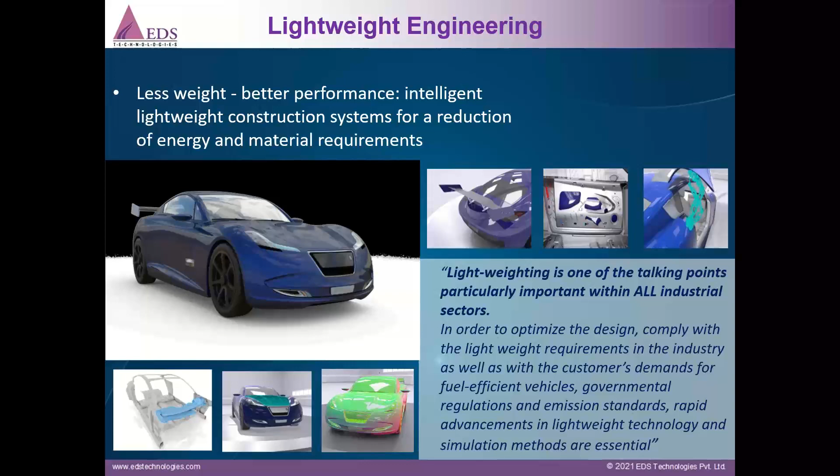Going back to the basics of lightweight engineering, also popularly known as lightweighting, which is basically a method for identifying the lazy parts. A lazy part describes a system - it can be a part, assembly or device in an automobile whose mass or portion of the mass is unnecessary. So we need to look at such parts.

They may contribute as a whole to the assembly as a system, but their mass is something which is unnecessary, which we can identify in the initial stage and try to replace or redesign them. A lazy part is basically one whose mass is unnecessary because the system is only required during the assembly process, and that particular part or assembly satisfies no functional requirements.

Or the system's functions can be replaced by redesigning the system - totally a change of solution principle - and then the system's functions can be transferred to another system by integration. That is, a part can be merged with another part to make it one single part, and the system's function can be conducted by an optimized system. This is the typical terminology we use in the automotive sector.

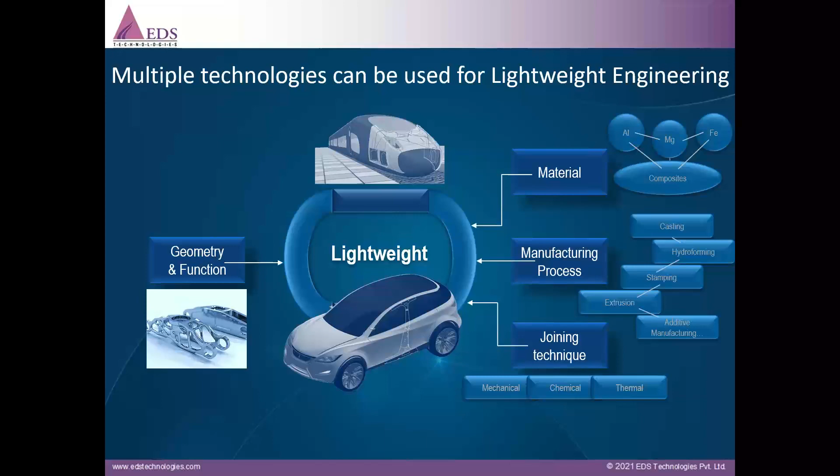So these are some of the important functions or technologies through which lightweight can be achieved in the automotive industry. One is materials, manufacturing processes, joining techniques, and also the geometry and functions. Let us see them one by one in this process.

We have a lot of roles or modules available within CATIA, a well-known software in the CAD world, wherein we can make use of these CATIA advanced modules to reduce weight and improve performance. We can do weight optimization using additive manufacturing techniques. At the same time, I can go for design for manufacturing using composites, making use of carbon fibers or aluminum and titanium, some of the few examples.

We can make use of these composite materials, which will make the entire component very light. At the same time, it is going to provide the best of stiffness and also thermal resistance, corrosion resistance, and so on. Similarly, we can also optimize the entire vehicle body using simulation concepts. I will explain these points one by one in the coming slides.

On the right side, you can also see we can optimize the manufacturing of thinner plastic parts with conformal cooling, and also optimize manufacturing of sheet metal parts. We can look at the overall weight of the assembly, monitor the weight, and balance it along the entire development cycle. We can also make use of an optimized fastening process through which we can cut down on overall weight and design lead time.

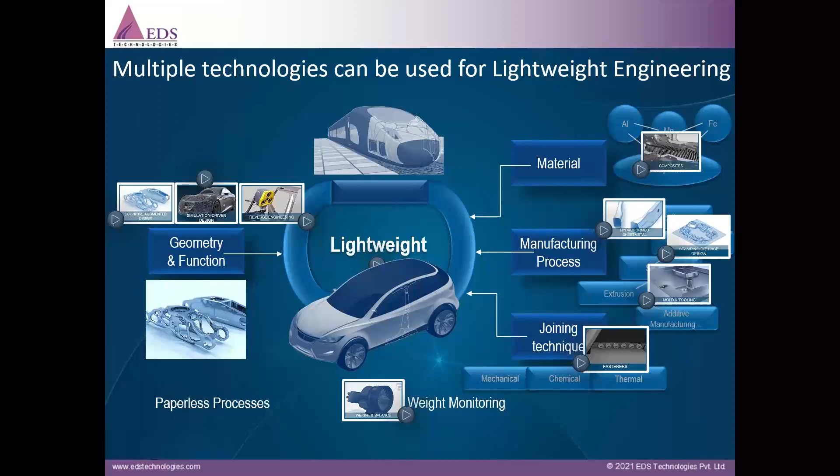And then the joining techniques, as I said, we can also make use of fasteners. This is another process through which lightweight engineering can be achieved. I will just highlight each and every one of these elements, which are going to work for lightweight engineering.

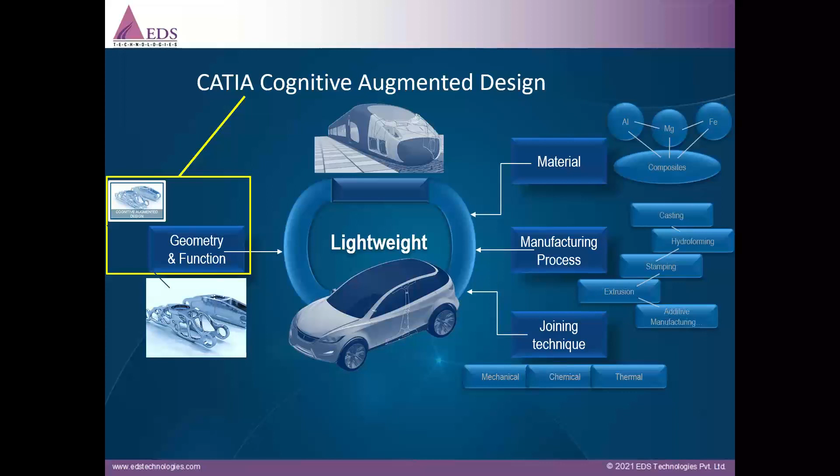So I'll start with geometry and function, because it is easier to modify the design and get the best shape of a given model or part, and then check for the performance and implement that. So we'll start with this process, which we call cognitive augmented design.

A human brain can recognize unknown shapes, and then they can be augmented in the form of a design process. So here in this case, there is a model which in the beginning has got a certain mass or weight, and then has typical functions. Looking at those functional requirements, by respecting the functional requirements, we can start the process.

We can also check for the loading conditions, and we can also set the manufacturing process. The manufacturing process could be milling, casting, or even additive manufacturing. So we can set the manufacturing process in this aspect, and we can run through simulation, find out where exactly the stresses are coming in, keep those areas where stresses are coming in, and remove the areas where there is no stress or pressure distribution across.

So by removing such kind of areas where there is no difference in terms of stress levels or pressure distribution, we can remove those areas in the form of shape, and come out with the areas which are actually contributing towards the loading conditions and performance.

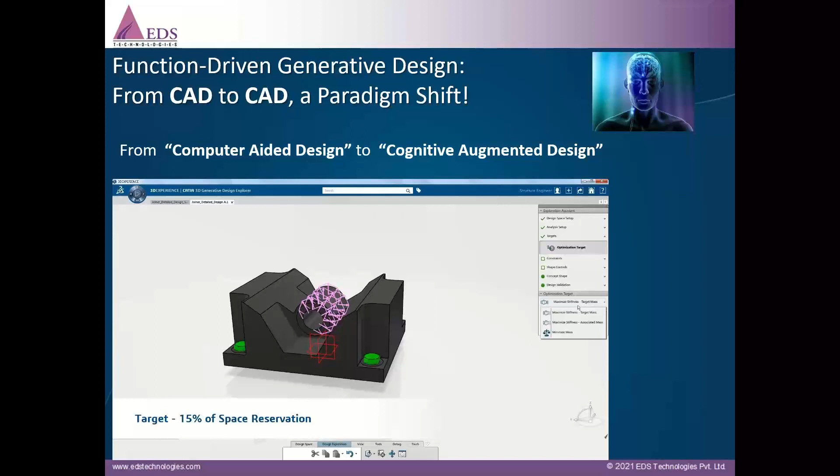And then arrive at the final shape. So this shape can be again formed based on specific manufacturing processes.

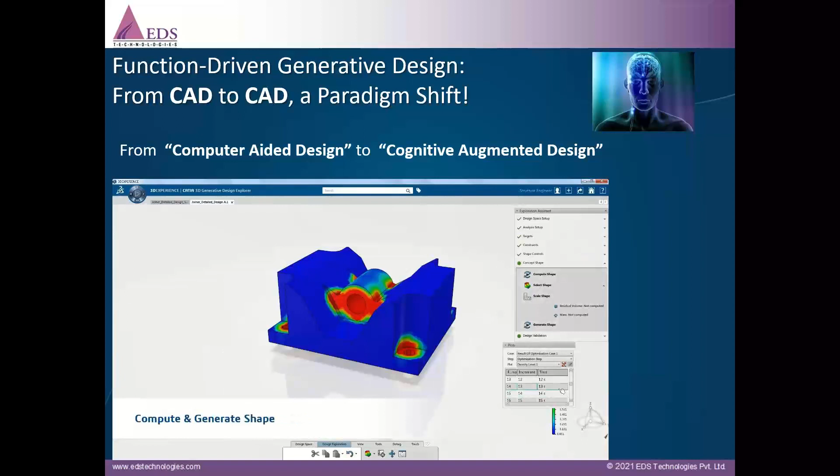As I said, it could be casting process or milling process, or it could be additive manufacturing as well. In additive manufacturing, there are no constraints because we are just adding material using different 3D printing machines. So by combining designing, simulation, and manufacturing under one roof, we are arriving at the final optimized shape of a model, which we can make use of for weight reduction as well as cost reduction.

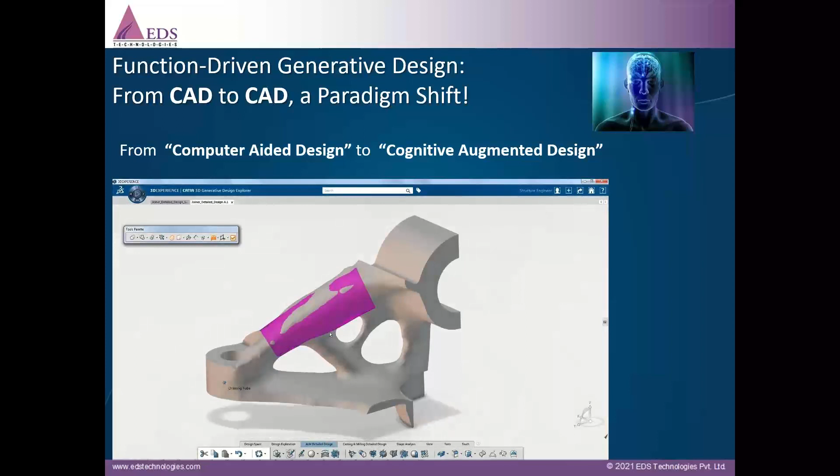So this is called cognitive augmented design, which is in place. Similarly, we can actually move from current traditional design to a science-based generative approach, because we are able to recognize such augmented shapes for the design and implement those shapes with respect to specific manufacturing processes.

This is possible only because we are able to integrate modeling and simulation along with manufacturing constraints in place. Using CATIA Function-Driven Generative Design, we are able to eliminate such weight when we are going to arrive at the optimized shape, which is also manufacturable from the perspective of manufacturing. That is how we arrive at lightweight engineering and reduce the weight and cost as well.

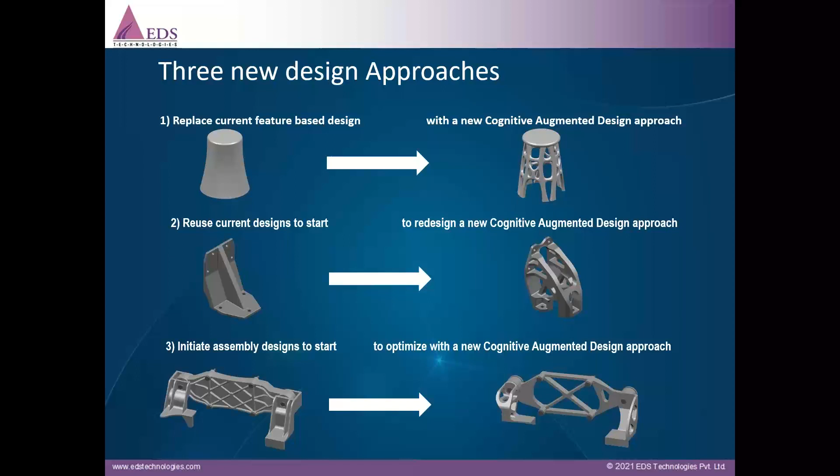I will take one more example. If you see the legacy component on the left side, it is around 414 grams, whereas the component which has gone through milling process is around 324 grams, which is 78% of the actual weight of the first component.

And when you go through additive manufacturing, there are no manufacturing constraints in the beginning phase of design. There you can see the best shape coming in without losing any performance with respect to the functional requirements. So without losing performance, we are able to arrive at overall 55% of the weight with respect to the legacy component on the left side.

I will take one example from the automotive industry, wherein we are able to see this kind of weight reduction process in place. This is a typical example of a car hinge, used for opening and closing the door. This is a typical component which is going to go through this process of topology and shape optimization.

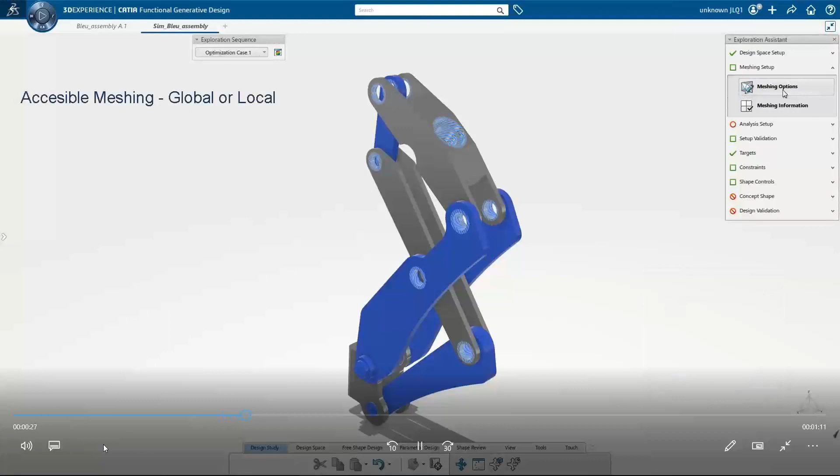What we do is recognize all the locations where there is motion happening through kinematics, and the loading conditions, because there is certain load acting from the car assembly. We take care of those loading conditions, and we set the restraints and clamping conditions, like the way we do with respect to CAE simulation setup.

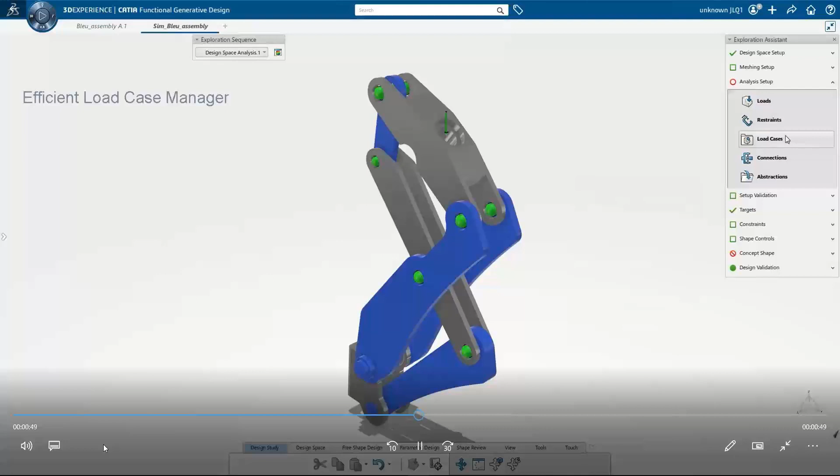And then we go for a first case, wherein we set the manufacturing process of, say, casting or milling or additive manufacturing. So we can set that manufacturing process and constraints and do the study. This is a quick study which is running on the design.

So if it is a manufacturing process, how the motion is going to be and what is the reduced weight of the component. If it is additive layer manufacturing, how the component is going to look like and how the motion is going to look like. We can do this kind of validations and studies on this component and finally arrive at the best optimized weight component for this particular requirement.

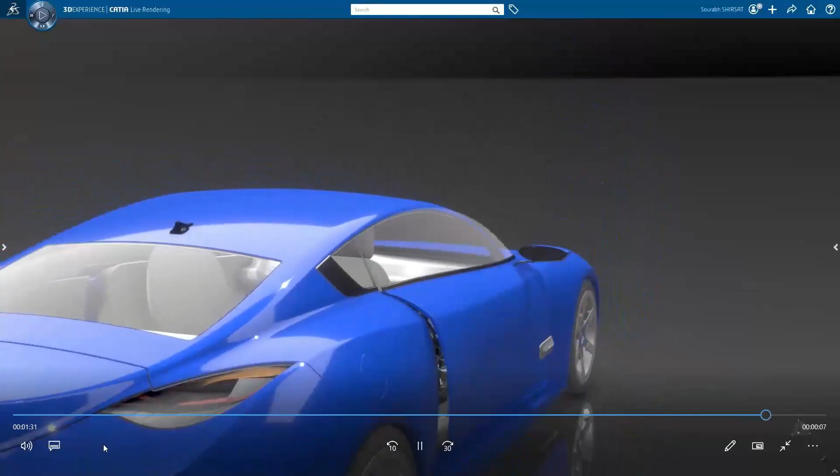So this is how geometry and function as a technology can be utilized using a combination of design, simulation, and optimization. This is one example I wanted to highlight with respect to lightweight engineering.

So if you see in terms of process, we are going from the design space, from the legacy component, setting the functional specifications, going through concept generation. Then finally, when the shape is removed, we are creating the exact solid generation.

Then we go for testing that exact solid in the FEA workbench, and then go through the simulation and see whether performance is the same or better.

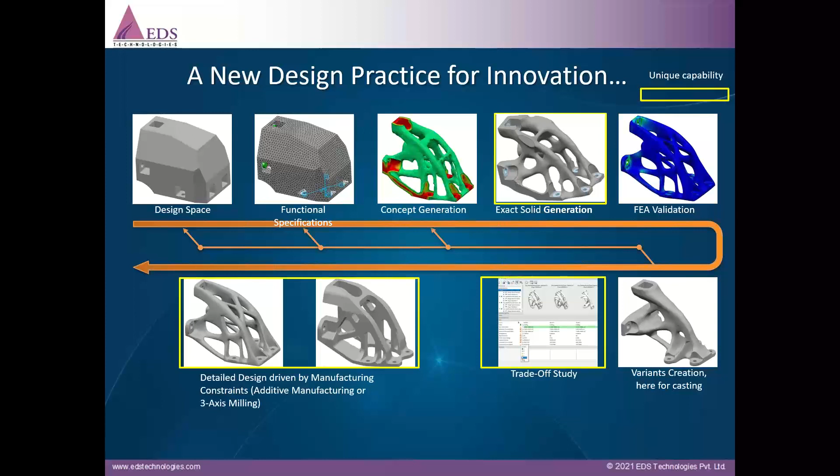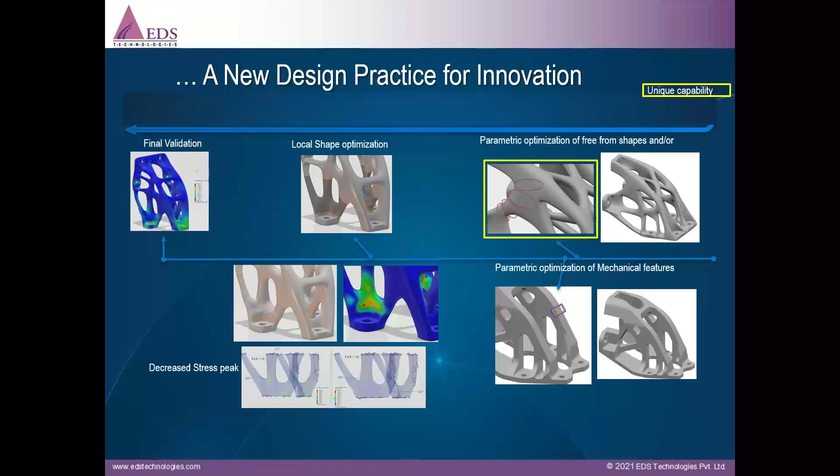So we can optimize the performance, we can optimize the weight, and as a result also the cost. This is possible using CATIA's generative design function. The benefits are that you can quickly run through a separate set of manufacturing processes, arrive at best shapes using these processes, and finalize and optimize the design resulting in lightweight engineering. The software is able to calculate those areas where there is no impact of stress or pressure, identify those areas, remove material in that area, and come out with an optimized solid model which is far better in terms of performance and reduced weight. This is possible under one workbench called CATIA function driven generative design.

It is also easy to quickly learn. Any designer who knows a little bit of analysis can run through this process and start making use of this entire process under geometry and function technologies.

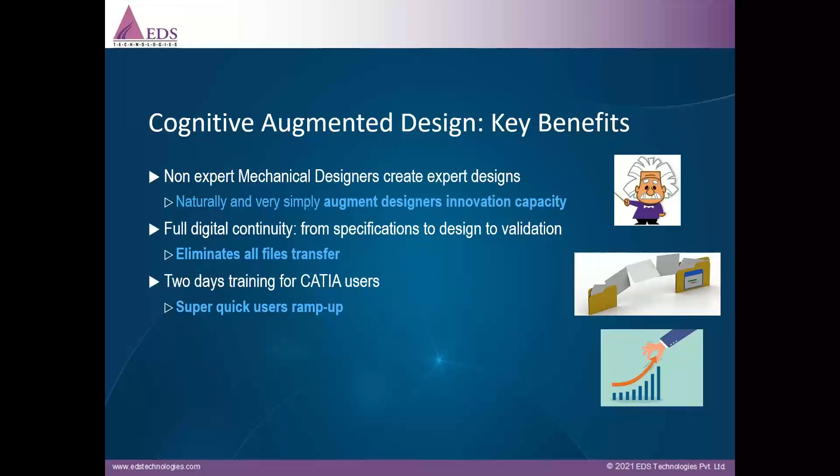Then the second process is called SFE Concept. Basically, SFE Concept drives the entire vehicle body structure as one. Dassault has come up with SFE Concept, which is simulation of FE mesh models, which can be done very quickly, and we can arrive at the overall body structure with different design of experiments. So I will run through this process using SFE Concept here.

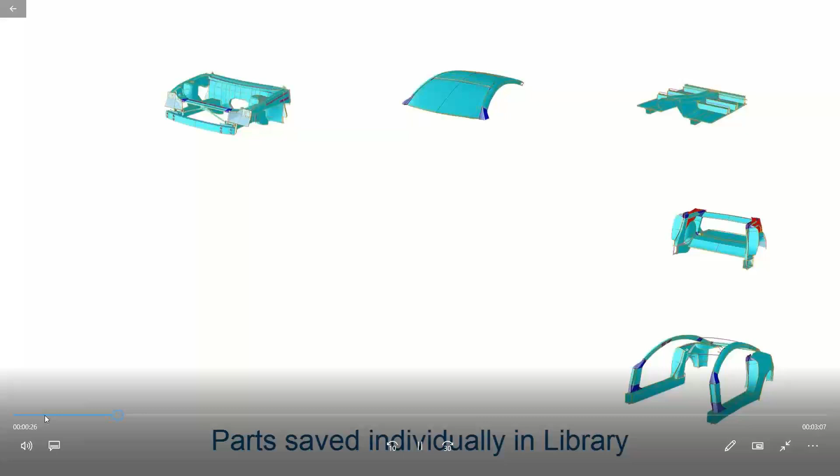In this case, we have a set of libraries which are readily available. We can bring in all those components one by one, position them correctly, and then make an assembly from the library directly. This is very much feasible under SFE Concepts. The ready-made models are available as part of the library, just bring them in and assemble them.

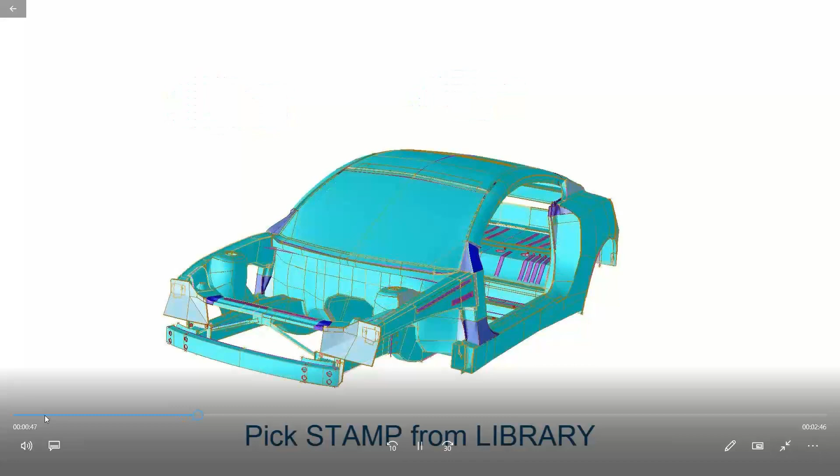These sub-assemblies are all parameterized models, meaning they can be modified in all possibilities in terms of height, length, and width definitions, and we can change those models in a very short span of time. The meshing also will be faster because there are already built-in libraries available from SFE Concepts. So we can quickly create the entire body, merge two bodies together, and make the complete body structure in a very short span of time.

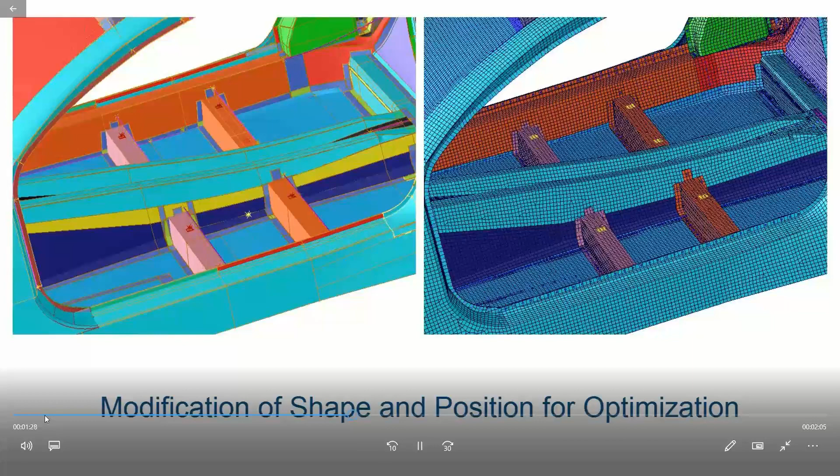After creating this body structure, we can also quickly analyze different variants by positioning the particular structure in the chassis frame to see how it's going to impact the overall performance. We can do all that quickly using these topology optimization tools, which are part of Simulia.

These SFE concepts are readily available. We can run through a set of variables and design of experiments, and arrive at the final assembly shape. We can increase or reduce the overall height of the vehicle assembly based on the simulation constraints.

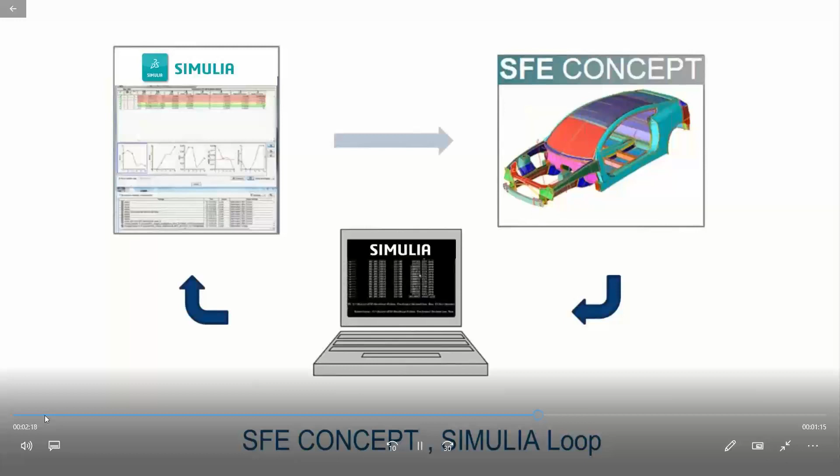We can check for all kinds of analysis, such as static analysis or crash analysis - frontal crash and side crash analysis. All these things we can run through effectively in a very short span of time, because we already have inbuilt libraries meant for the overall body structure.

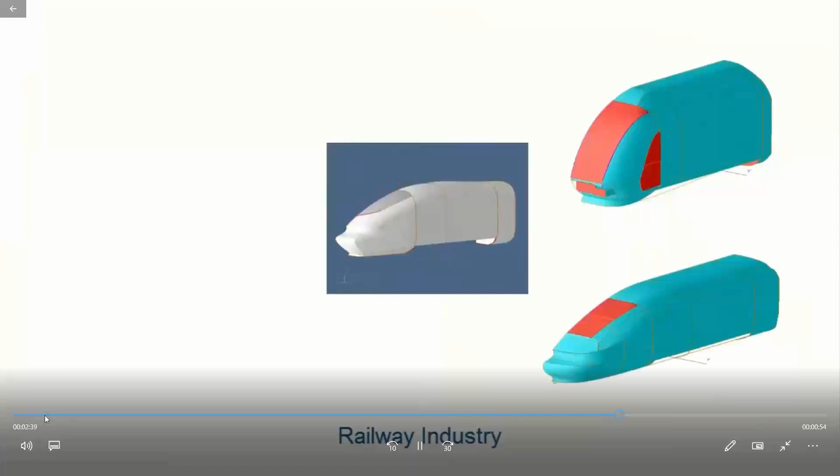By keeping certain variables and constants, we can arrive at the final dimensions of a given assembly in the automotive segment. The same SFE concept can also be utilized in other segments. Here we can see that by changing the B pillar position, we are able to increase or decrease the overall height of the vehicle.

The same concept is also available under the locomotive segment, wherein in railways we can set the railway cabins and see how fast we can change the overall design of the locomotive assembly. Similarly, in the offshore industry, we can make use of SFE Concepts for wind and energy segments. These SFE concepts come with ready-made available libraries for the automotive segment or any other segment.

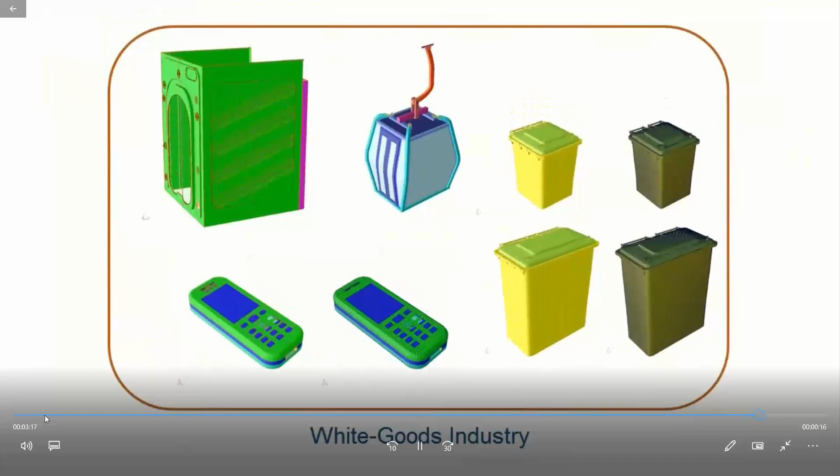Using these libraries, we can quickly position the assembly, make changes of variables, and start doing the design of experiments to arrive at the right shape or optimized design. This is another technique wherein there are tools available which work 20 times or 15 times faster than regular design and simulation tools. Because there are inbuilt libraries, we are able to do these quick simulations and find out alternative designs for the overall vehicle body structure.

So in this case, the advantages are that we can do 20 times faster generation of simulation geometry. In a regular approach, the design department sends data to the simulation department in the form of IGS or STEP, coming in bits and pieces because they will not give the complete assembly in one go. Once assembly is made, we need to look at overall meshing of the entire body structure, and finally set all loading conditions and constraints before simulation. This entire aspect of doing simulation after the design process and going for iterations takes a lot of time.

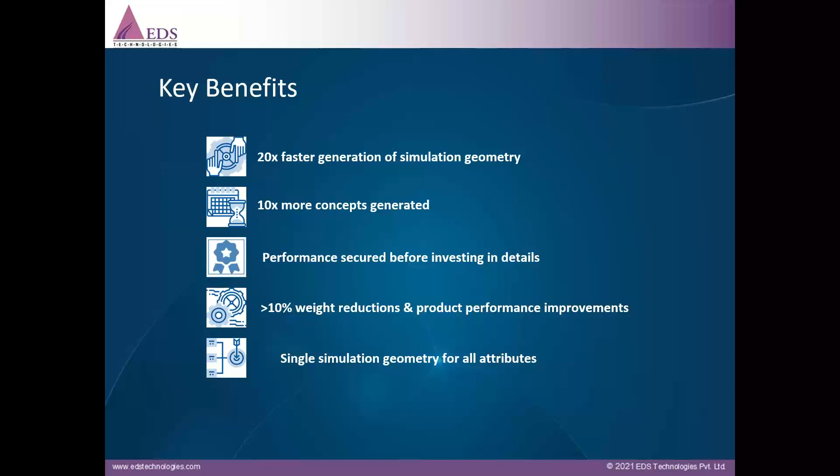So if you go for SFE concepts, you are reducing a lot of time and saving a lot of time. At the same time, you are arriving at different alternative design concepts in the quickest possible way. There are many customers and OEMs using these techniques.

Jaguar Land Rover, JLR, uses these SFE concepts. Honda also uses SFE concepts. Ford also uses SFE concepts. They make use of these tools effectively because they want to save a lot of time on the design process, and also arrive at the best shapes and models using this overall SFE concept. So this is another way of looking into lightweight engineering, and JLR and Honda are critical examples in this process.

So now let us move on to the third process, which is reverse engineering.

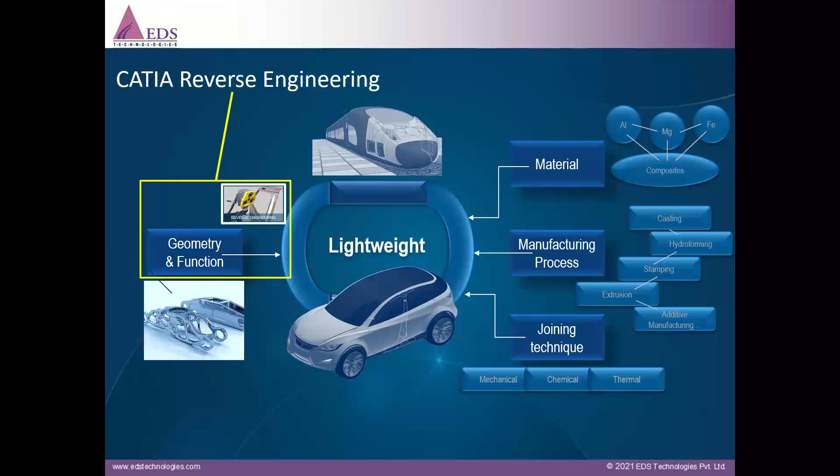In case of reverse engineering, you will be receiving cloud point data, and the question is how fast you can create surface models from this cloud point data and use these surface models for further design processes quickly to arrive at the final shape. This is where reverse engineering is very helpful in terms of design lead times, overall cost reduction, and weight reduction, because you should have a quality surface which can be edited and modified anytime to arrive at the final shape. Such processes are available under CATIA reverse engineering.

I will take a simple example of surface model reconstruction using this reverse engineering process. We have something called a digitized shape editor, or digitized shape to surface model, where you bring in the cloud point data. There are multiple formats supported by CATIA, either IGS, ASCII, or others—around 12 to 13 formats are supported. You can bring in this cloud point data directly from the image scanner, and then create the overall surface in the quickest fashion.

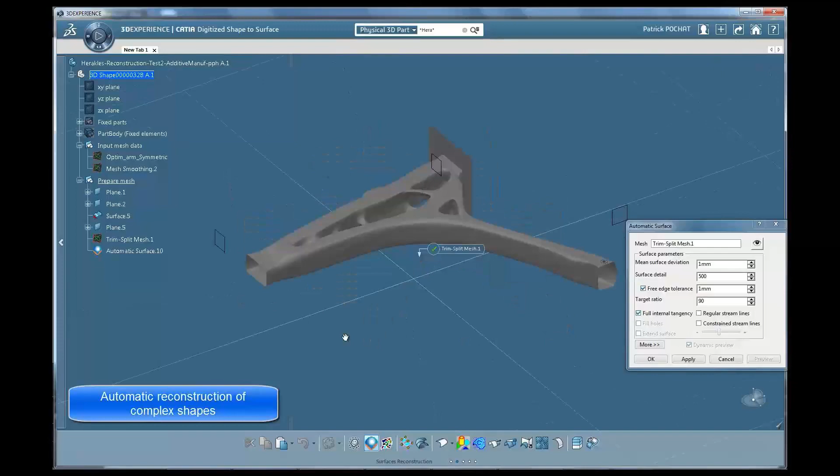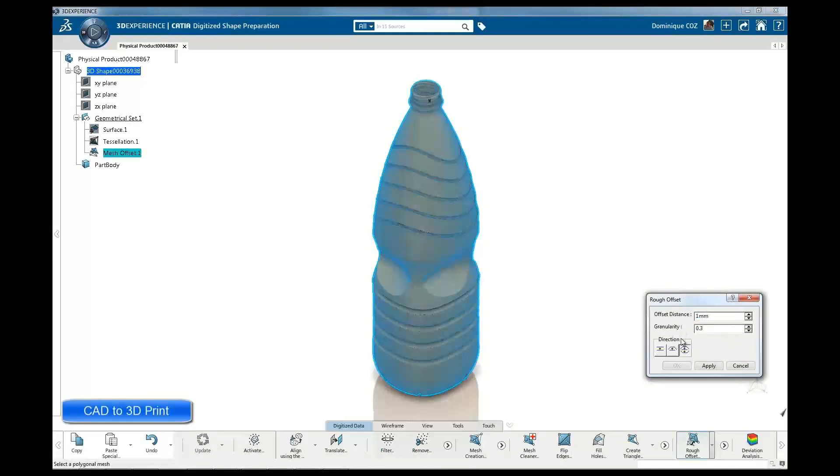There are multiple examples with respect to the automotive industry. We can look at shape morphing and shape controls. We have various surface modules which can take care of reverse engineering very effectively. We can go for quick surface reconstruction, and by doing so, get the actual model in the form of a high quality surface. This surface model can be utilized for further design processes quickly to arrive at the best shape. This is something possible only through reverse engineering.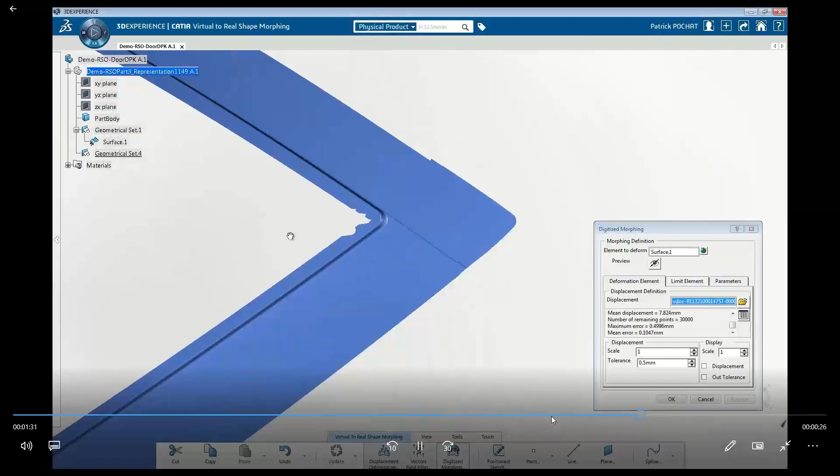So what are the key benefits? One is that we are able to reconstruct surfaces quickly from the cloud point data, and we are able to measure the deviations. We have surface deviation analysis tools readily available, which show the difference between the actual cloud point data and the surface that is generated. We can analyze that gap and accurately create the shape in the shortest span of time. That is something possible under reverse engineering.

So this reverse engineering is one of the processes which can contribute towards lightweight engineering. Then comes another important aspect from the material perspective.

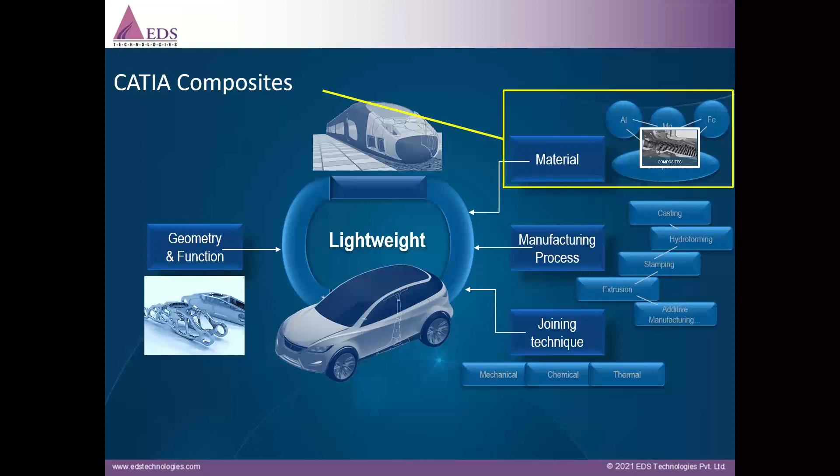We can make use of composites in the automotive industry, and we can bring out the best of components using composite materials. So I will take a simple example with respect to the automotive industry, wherein we are able to create a B pillar of an important global OEM, BMW.

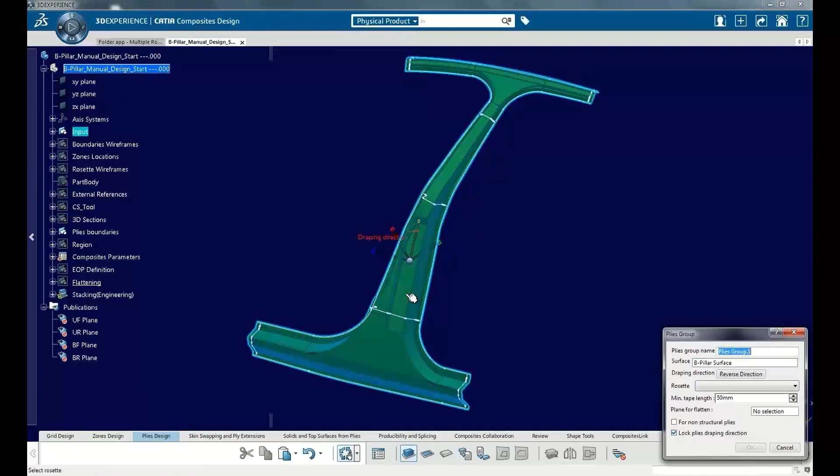So in this case, this is a B pillar which is taken, and we extract the surface of the B pillar, and now we are trying to go for the ply definition. So typically we need to define the different set of materials which will contribute to the B pillar, and then once we define the materials, we go for ply definition and ply generation.

Again, there are multiple techniques under CATIA. It could be manual ply generation or automatic ply generation, following different techniques like zonal approach or grid approach. So we can make use of multiple techniques under CATIA to get the stack up for this entire model.

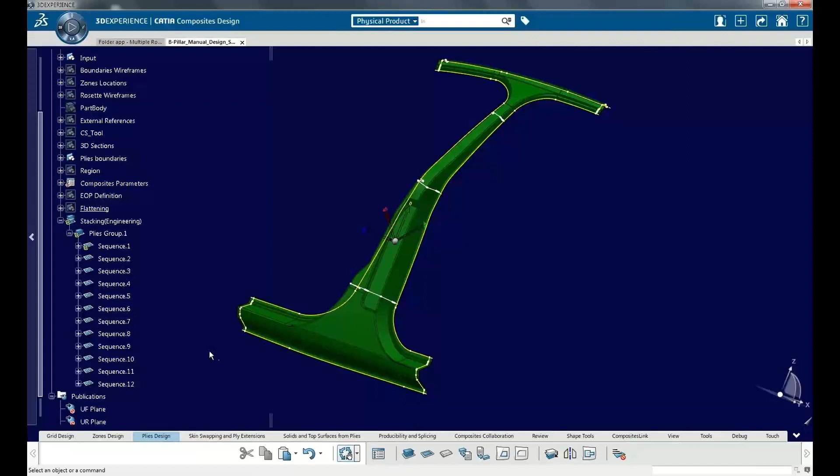So once the stack up is defined with the sequence, then we can go for the manufacturing preparation. So stack up is being created here in a manual approach. We can also follow multiple techniques in this regard. Since it is a simple component within the automotive segment, we are able to complete this process with manual ply definition and the complete stack up.

So once plies are defined with the materials, orientation, and also the thickness, we can see the complete ply section using this sectioning definition. So we can cut the section and see how many plies are there in this particular section and how they are defined with respect to the materials. If you have any specific materials, it will highlight that in different colors. So this is how we complete the stack up definition.

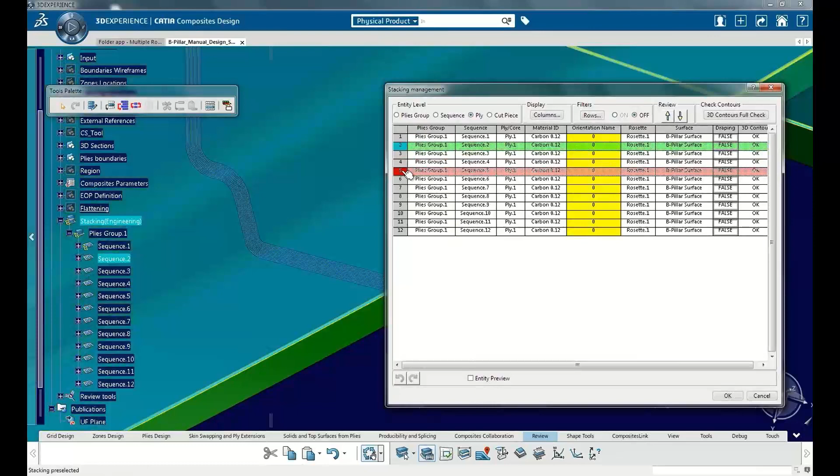We can also export that into Excel sheets, and we can also modify in Excel sheet and bring it back into CATIA. So we can change the design, change the entire stack up by using the Excel sheet itself. This kind of faster editing and modification can be done using CATIA composites.

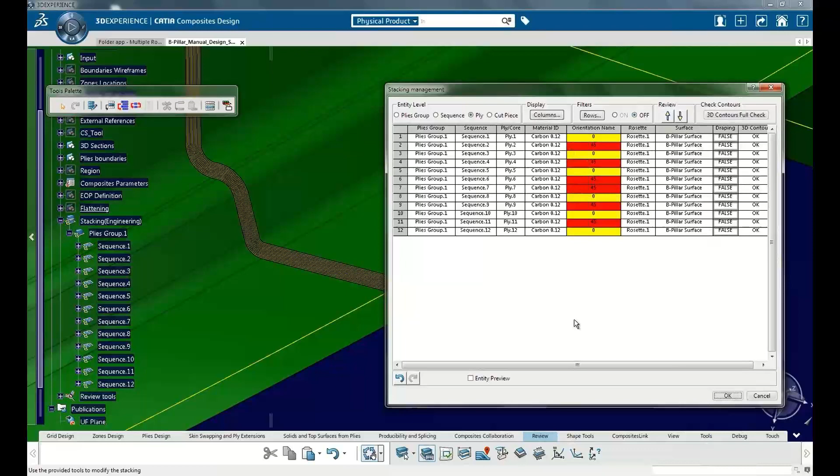So in this case, all are carbon fibers. Every ply is defined with its ply area, ply thickness, and ply orientation. So once we update that, we can see the update on the ply section as well.

So once we complete this detailed design of the B pillar component in composites, now we can go for the manufacturing preparation. We need to look at producibility analysis, which is done under manufacturing preparation, because before you get into manufacturing, you need to see whether the fiber propagation behavior is correct or not. So to check this fiber propagation behavior, we can set the seed point and run through producibility analysis and find out if the particular ply is manufacturable or not.

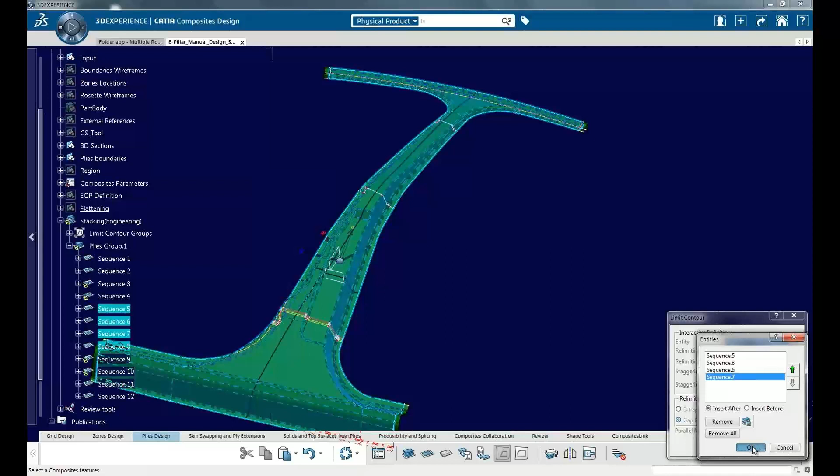So we can do that testing here and complete the producibility analysis part, and then go ahead with the manufacturing. So here in this case, we are checking the limit contour options for every single ply, because there are some tapered areas which need to be taken care of as a part of this design. This is a typical component coming from BMW, wherein we are able to define the tapered areas correctly with the limit contour option.

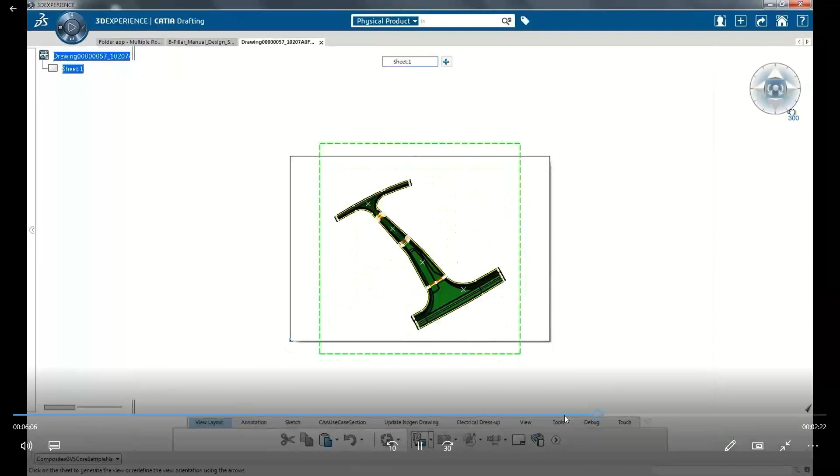And once the plies are defined and validated, we can go for plybook generation. So in the plybook, basically we need to flatten all the plies first, after the producibility analysis, and we can generate the plybook from that. So this plybook is basically documentation for the shop floor operator.

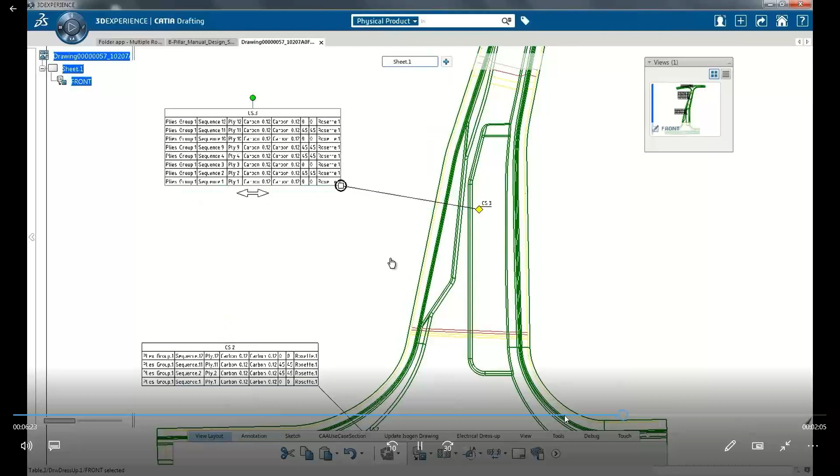So by looking at it, he knows exactly what is the orientation of each and every ply, and also the sequence of ply positioning. So he can know the sequence, ply number 1, ply number 2, ply number 3, like that. So he can accordingly place the plies, whether it is a hand layup or machine layup, because there are multiple sets of processes available as a part of this arrangement. So we can run through all this effectively

using CATIA composites. So once we have come out with the final shape, we can take these plies in the form of the plybook to the shop floor and manufacture them. Again, based on different types of processes, be it resin transfer molding or VARTM, vacuum assisted resin transfer molding, hand layup, machine layup, filament winding. So based on different techniques, we can set the manufacturing process and go ahead.

So this is one typical way of reducing the weight, and also this B pillar, which is going to be stronger with composite materials, can perform better than the regular metal components.

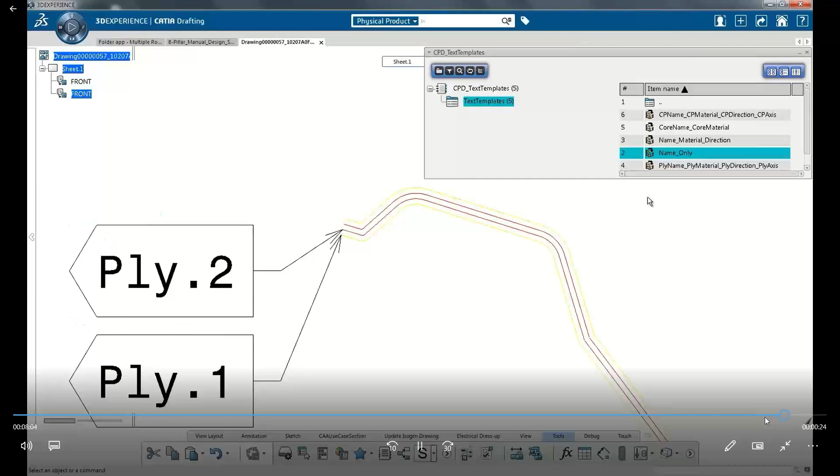So this is the drafting manufacturing documentation which is being highlighted here. This is one example I wanted to highlight.

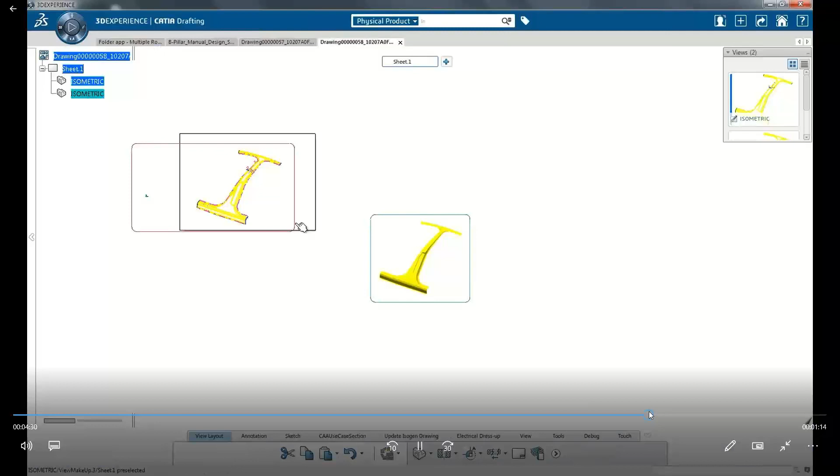Later on, you can also go for the plybook generation. What I mean is you can go for all the flattened plies, and then generating the plybook, which is the sequence of the plies. It also highlights the ply number, ply part number, the orientation of the ply, and what material is used. Everything is highlighted in the plybook. So this is how we contribute to composites detailed design and manufacturing.

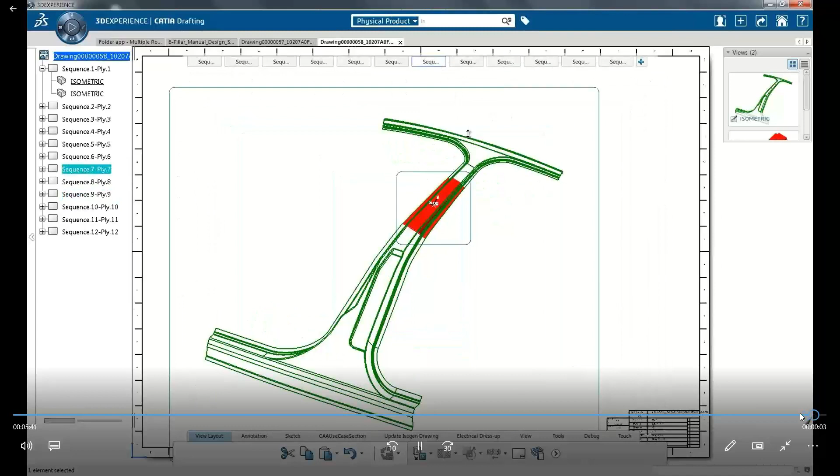Today, most of the automotive OEMs are looking for lightweight engineering through this composites process, because it is long lasting, especially in the luxury car segment. These composite materials are heavily utilized. Even Volkswagen uses them for sunroof panels, and we have BMW, Lamborghini, and all the luxury car segment going for composite materials as part of this lightweight engineering.

So what are the benefits of composites? You all know, in terms of corrosion resistance, reduction in weight, structural stiffness and thermal resistance. Apart from that, longevity or durability against fatigue also, so it can withstand many things. That is how you can benefit from using CATIA composites for lightweight engineering.

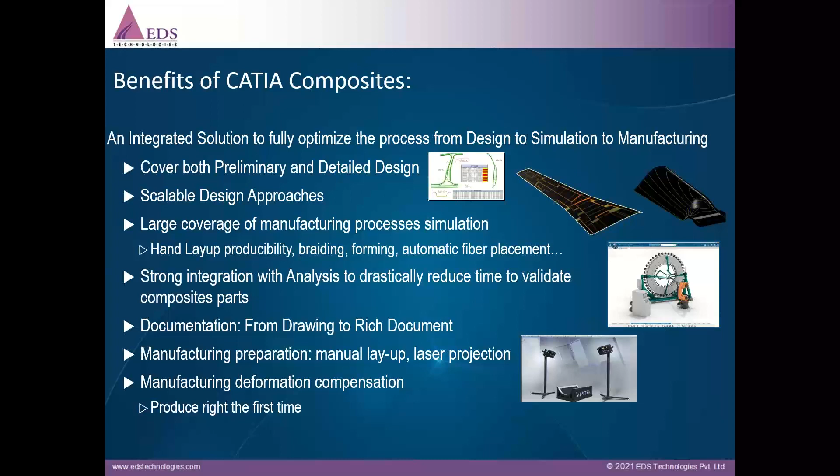I will move on, because the same things are applicable. The lightweight engineering is equally applicable for the electric vehicle segment as well. There are so many electric cars coming on the road, wherein they are able to make use of CATIA composites or the shape optimization tools for design through CATIA.

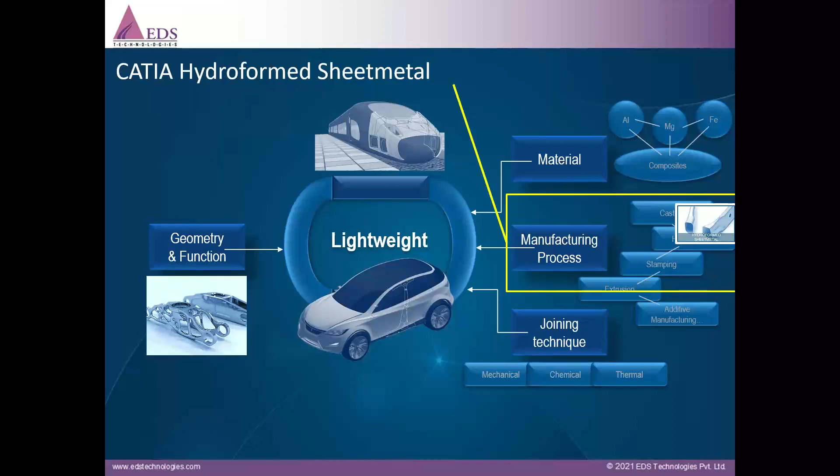Then comes hydroformed sheet metal design. From the regular sheet metal fabrication process, we can deviate and get into the hydroforming process, which is going to be more effective and provides better structural stiffness for the component. At the same time, the design process can be more robust as well. So in this case, I will take you through a small example on sheet metal design.

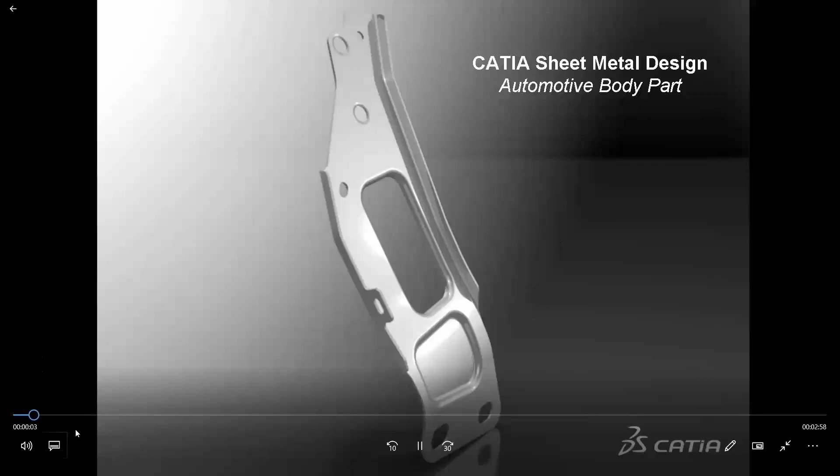This is a typical example wherein we can make use of a free-form surface, and we can create the component on this free-form surface, which runs in 3 different directions, X, Y, Z. So we can create that shape, pass it onto this free-form surface, and accordingly create the walls, surfacing flanges, joggles, and any other twist that is needed.

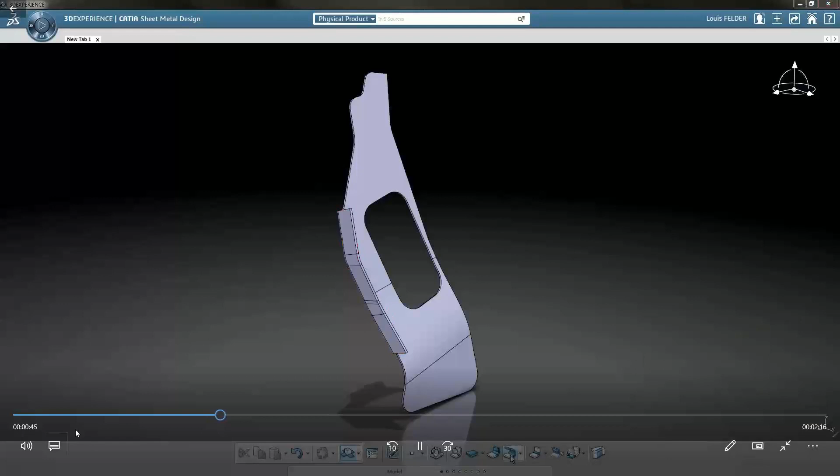Apart from that, regular stampings - these we can also do quickly and see. The important advantage of CATIA hydroform sheet metal design is that we can create complex sheet metal components in a very short duration, and at the same time it is very useful in terms of folding and unfolding operations. We can create unfolded views effectively with a click of a button.

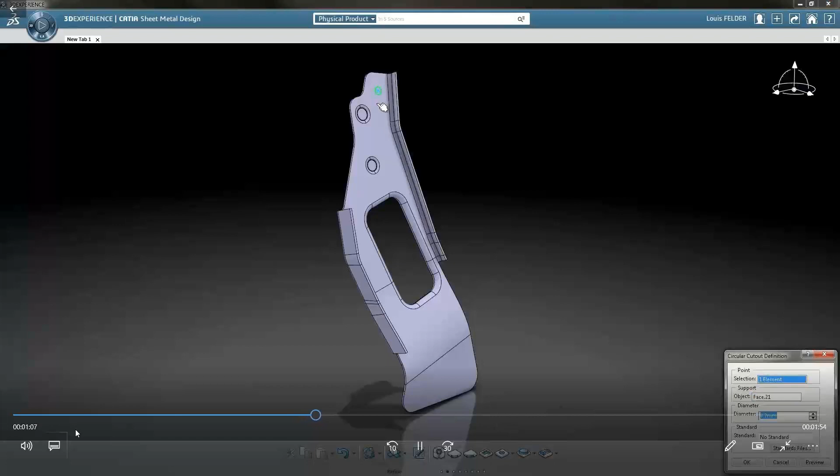So we can make use of all the elements of the sheet metal process - bridges, louvers, stampings, punch and die operations, surfacing flanges, joggles. All these things are readily available, and we can also quickly do design changes as and when needed. This follows the process of hydroforming principles, and it is very effective in terms of design integrity, and it will also reduce the overall weight and the design lead time.

These are the most important advantages, because there are ready-made tools readily available in CATIA, which are well proven in the industry for more than 3 decades.

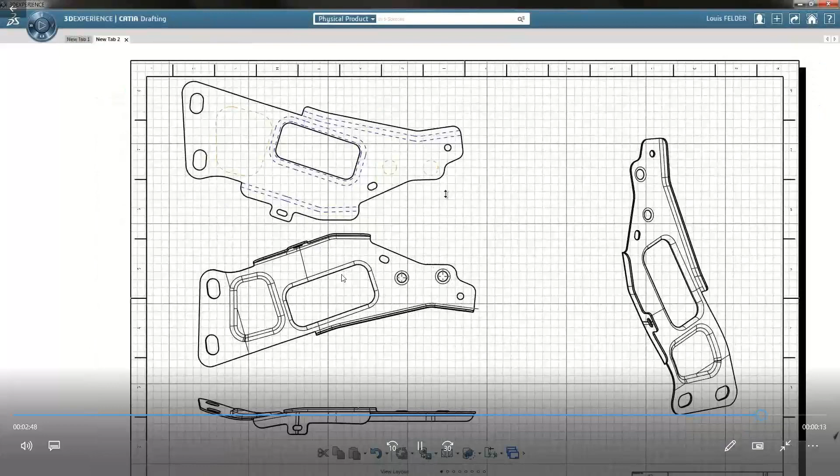So this is a typical example of a hydroform sheet metal design, which we are highlighting here. As I said, we can create folded and unfolded views effectively from this. There are multiple operations and multiple benefits coming from these processes. As I said, we can contribute to lightweight engineering from the manufacturing processes, and one of those processes is hydroform sheet metal design.

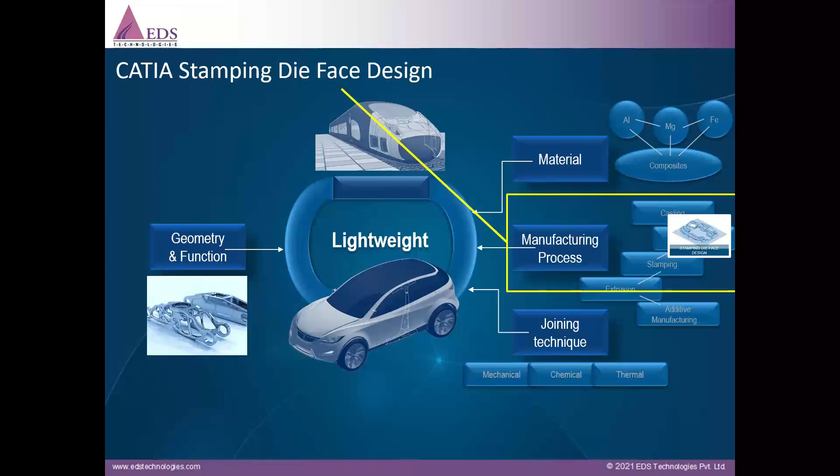Then comes stamping die face design. Under this, we need to look at the press line, how we are going to set it up, and also remove all the scrap elements in the initial design stage. Here also, CATIA stamping die face design will be extremely useful for the automotive industry.

If you see the process, the typical flow is like this: we set the part layout, the blank definition, then look at the trimming concept, identifying the flanges, operations planning, and the scrap elements concept, followed by surface extensions, because we have to look at the extrapolated surfaces on the profile. Then automatic filling, because while filling the surface element, we also need to look at continuities. CATIA surface design is one of the strongest tools available in the market.

We can make use of these surface design tools effectively for this stamping die face design process. From the manufacturability perspective, the CATIA surface which is generated is a very high quality surface, which has never failed in terms of manufacturability, because it adheres to mathematical principles.

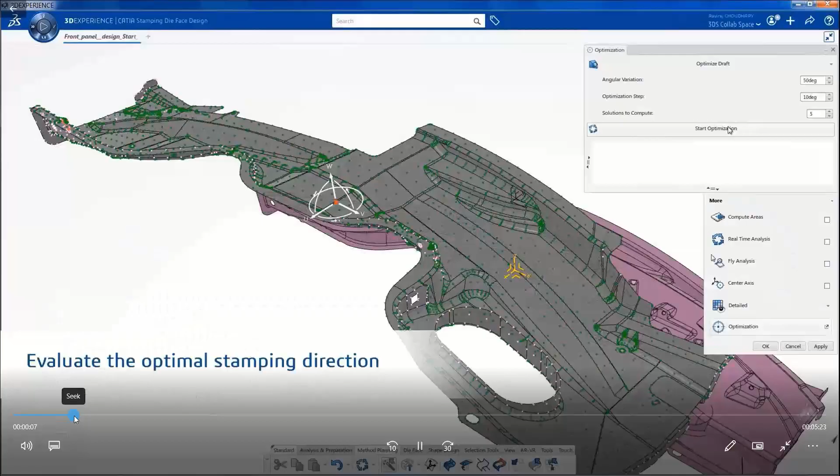I will quickly take you through this process. I know this is a short webinar in which we are trying to look at the concepts which contribute towards lightweight engineering. In this process, we are looking at the optimal stamping direction first for this given component, and then we are defining the compass, which we call robot here in CATIA.

Later on, we look at the final elements in terms of edges, so look at all the flange areas and fillets. Then we can increase the productivity by automatic split of these elements by having 3D curves. CATIA has a 3D curve definition, which can be very effectively useful in this regard.

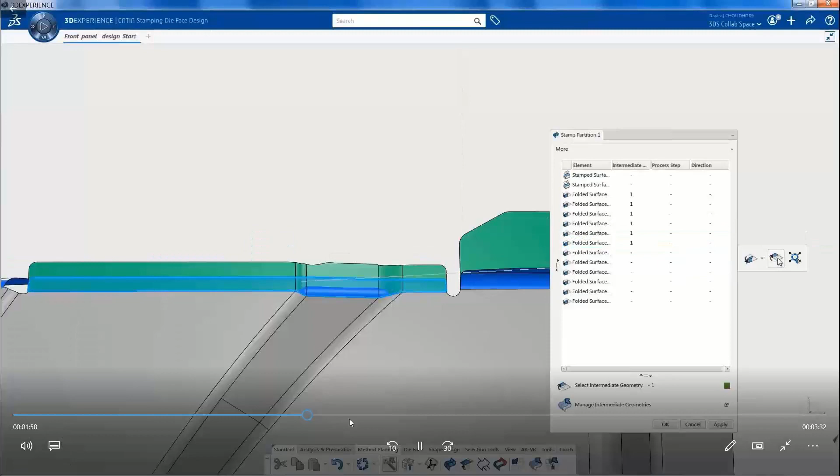We can quickly generate the extrapolated surface from this model, and fill the surface that is between the splits. This kind of filling the surface with tangential continuities is a very effective tool with respect to die face design operations. So the surface design modules will definitely help in this aspect, because they take care of high quality surface with all the continuities.

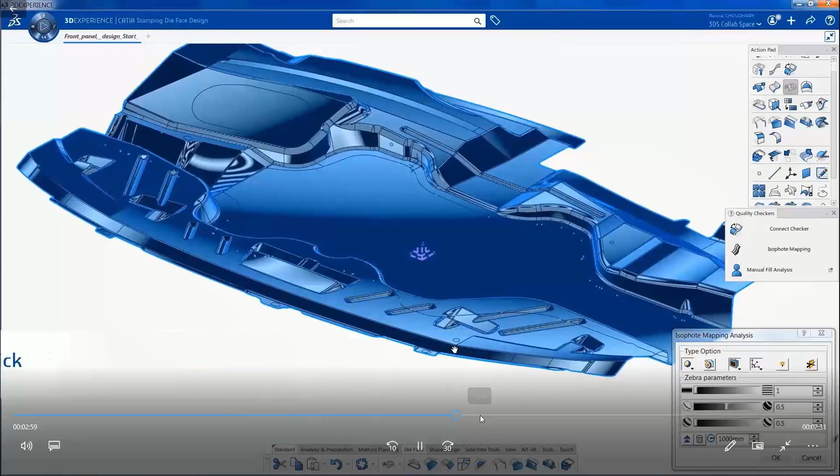And then you can see the set of operations for this die face design. The press lineup is ready. Then we can go for multiple wall surfaces definition. We can fill the areas quickly and arrive at the final surface. This final surface quality will be very high, and it can be used for downstream processes effectively.

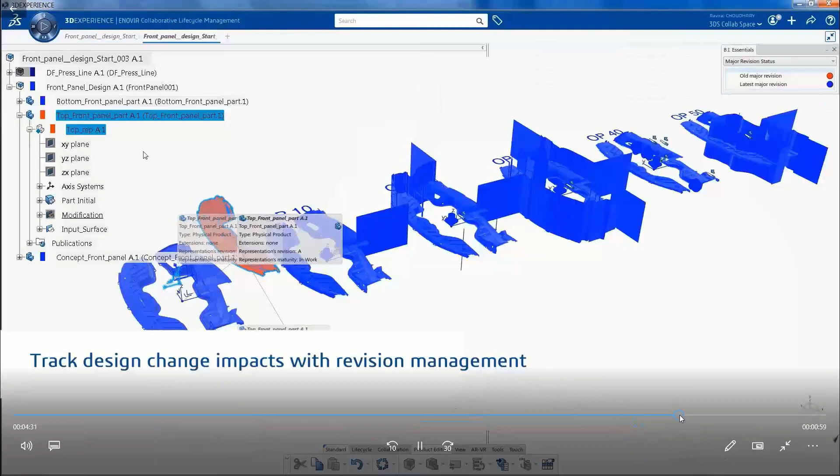So in this entire process, we are actually looking for the scrap elements. Whichever is highlighted in red is a scrap element. We can remove that scrap element in the initial design process itself, and ensure that in the least possible time we arrive at the best design in this case.

That is how CATIA stamping die-face design is going to be helpful for lightweight engineering. The design lead time is going to drastically reduce, because we are going to make use of the knowledge and know-how from CATIA design.

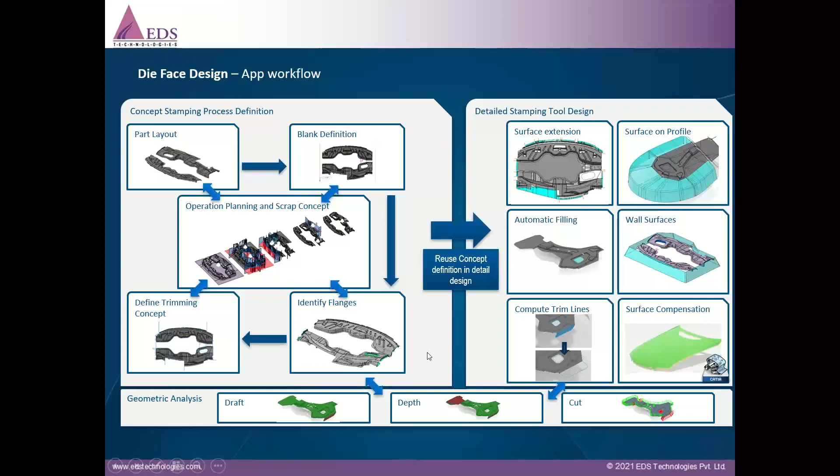This is another example of a manufacturing process which is highlighted. Here we can look for a 50% gain in productivity, and also it is a fast and robust update. If you make any small changes here and there in the design, they can be impacted immediately in the die-face design process. That is something very important from the design iterations perspective.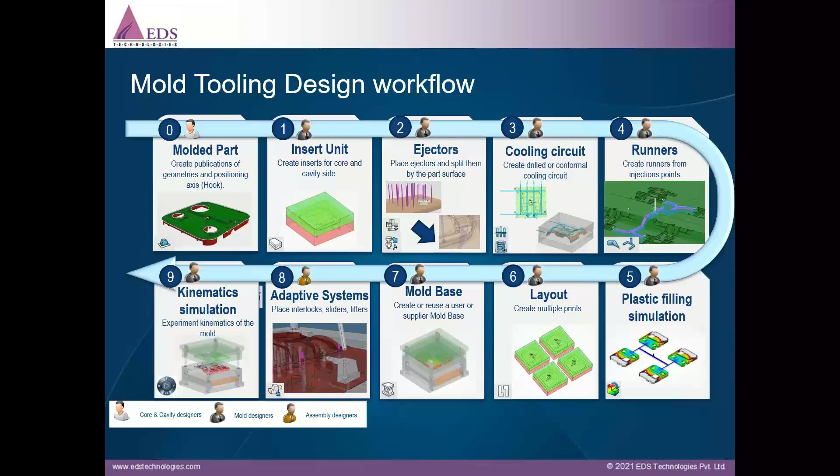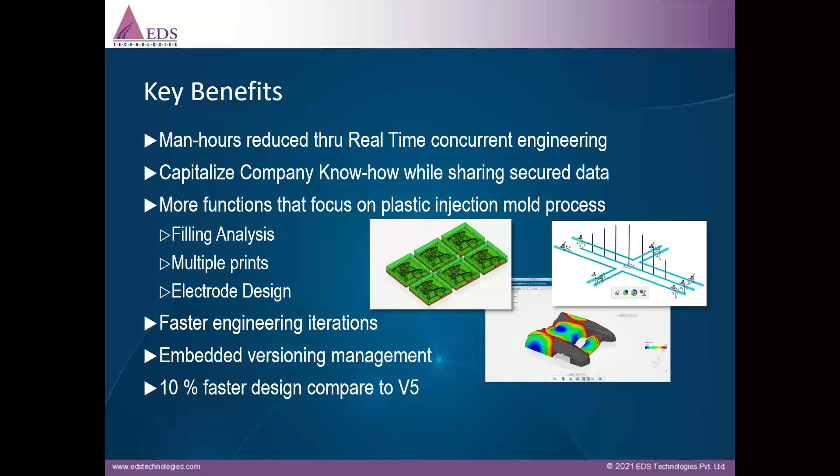Then comes CATIA mold and tooling design. I will not take much time here; I will quickly go through this mold and tooling design workflow process. This is a typical process through which we follow. Here also we have very effective tools for plastic parts, especially thin plastic parts. We can see improvement in terms of 10% faster design, and so on.

In terms of overall summary, we have made use of different technologies to reduce the overall weight of a part, and also reduce the cost. At the same time, we are able to reduce the total overall design lead time. We are able to see a minimum 10% of productivity gains through different manufacturing processes. So be it geometry function using topology and shape optimization tools, or materials using composites, or manufacturing processes or joining techniques, we are able to greatly benefit from these CATIA advanced modules, which are contributing significantly to lightweight engineering.

I will summarize with a small video which will complete this entire lightweight engineering overview for the automotive industry. This will summarize what all is possible from the automotive industry perspective. We have gone through several examples, and this is a summary of what is possible under lightweight engineering or lightweighting.

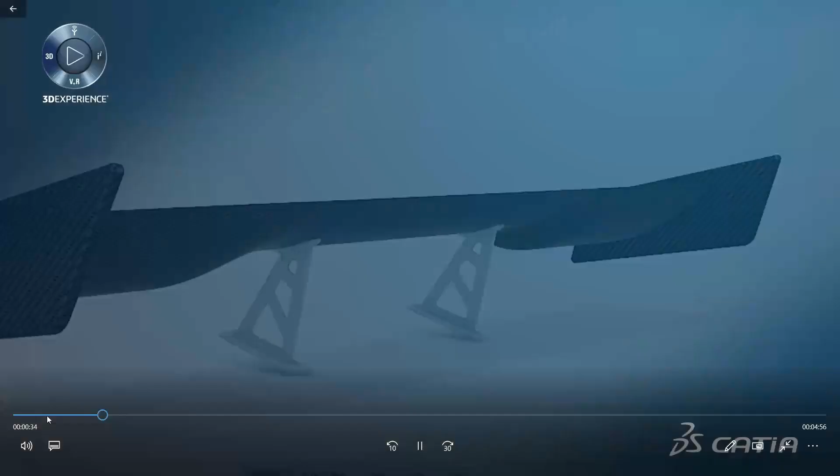In this case, the typical example is a spoiler of a car, staying at the back, which is again made out of composites.

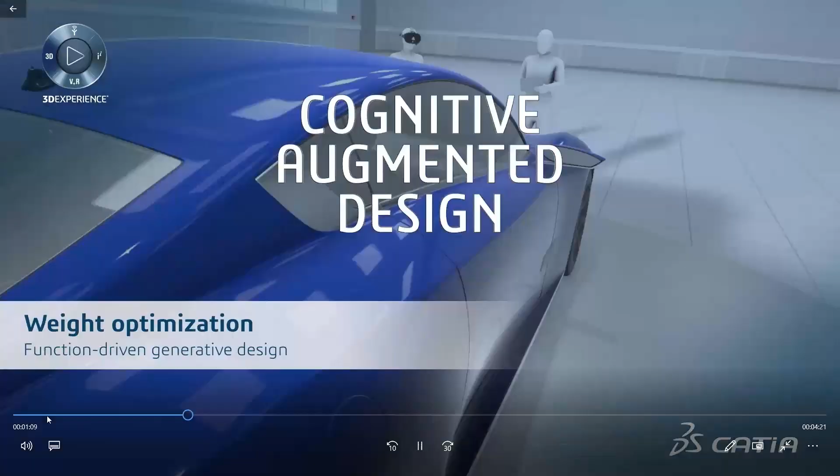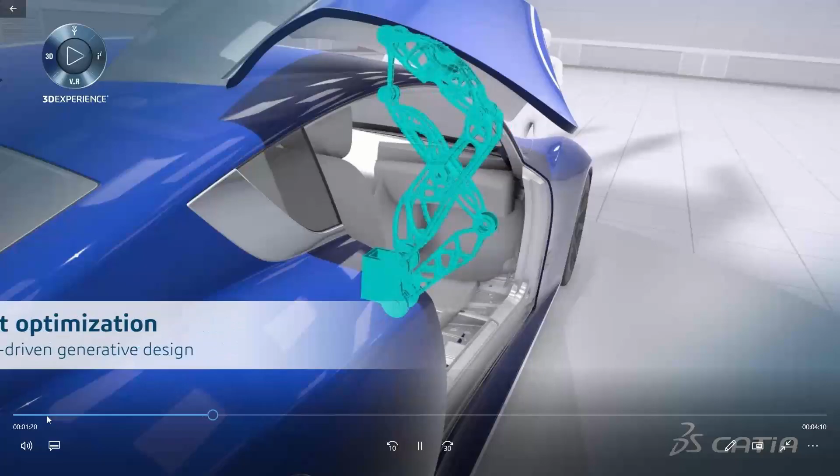So be it cognitive augmented design or simulation driven design, or it could be composites or hydroformed sheet metal parts or reverse engineering, all these aspects can address lightweight engineering or weight optimization. This example was highlighted in the beginning in terms of weight optimization using design, simulation and optimization tools in one single go.

In this case, we are arriving at the shapes with respect to manufacturing processes quickly, and we are able to finalize the final shape coming from the specific manufacturing process. We call it cognitive augmented design because we are able to recognize those augmented shapes and then change the design accordingly. The second aspect is SFE concepts, the simulate FE mesh models.

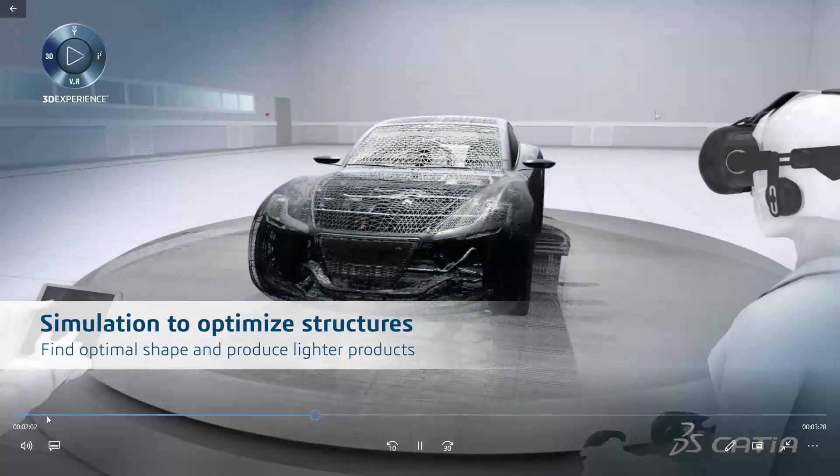We have ready-made libraries available for a car, which can be utilized effectively, and we can quickly run through the simulation for the entire vehicle body structure, and arrive at the overall dimensions quickly. Be it crash analysis, or regular non-linear analysis, or static analysis, we can do all those using these SFE concepts and arrive at the overall body structure.

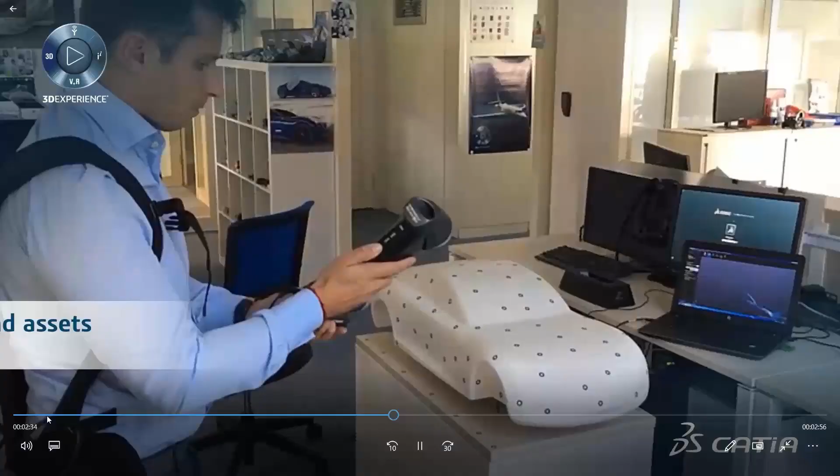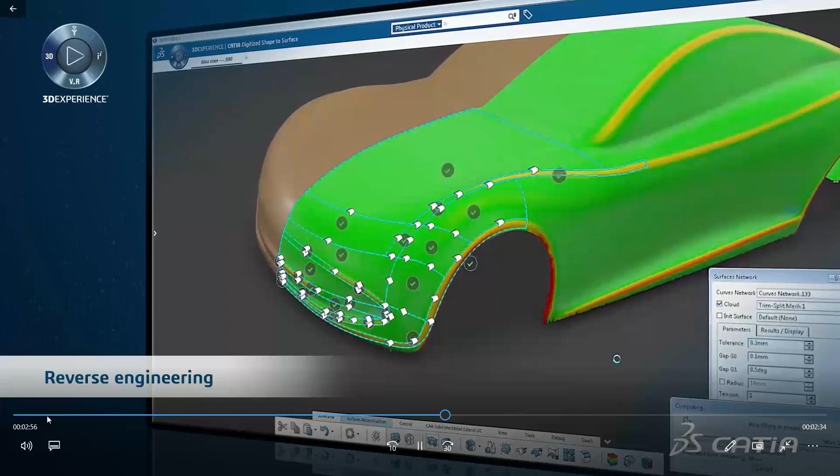Then the next one is reverse engineering. Here we are taking the scanned image from the car and reflecting that in CATIA digitized shape to surface role module. We are able to quickly create the surface and also modify it quickly, which is tangent and curvature continuous. This way, we are not only creating the surface model exactly, but also able to do modifications and changes to impact the overall weight of the part. So design modifications are very quick with respect to reverse engineered surface from CATIA.

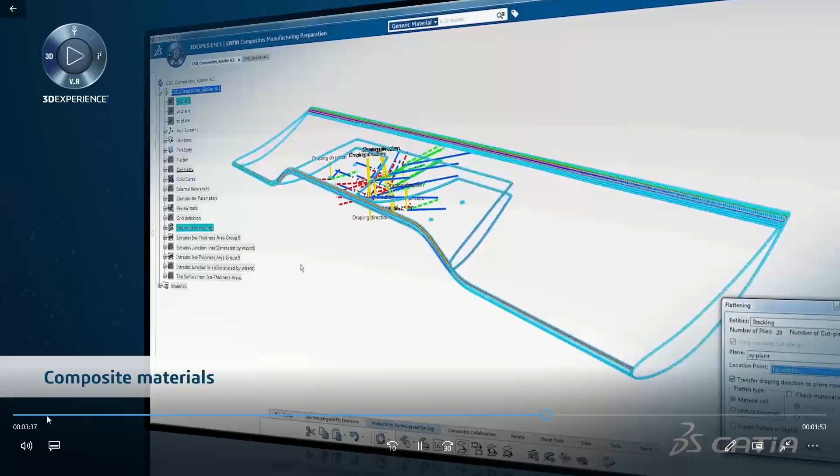Then the next part is composite materials. Again this is for the spoiler used in the automotive vehicle. Here we are able to create this composite material from the compression molding process. We can make use of these sets of composite processes, check the fiber propagation of the plies, flatten the plies, and go for the plybook generation using this.

Then comes hydroform sheet metal design, which is again very effective in terms of structural performance and integrity, and also the overall stiffness. In this case, we are able to arrive at this kind of design effectively using the hydroform sheet metal workbench in CATIA.

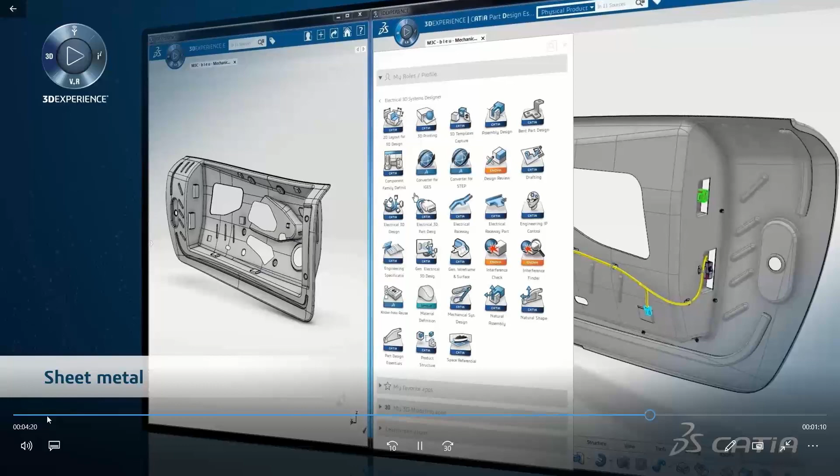So these are a summary of manufacturing processes through which we are arriving at lightweight engineering. We have a set of roles available for all these aspects as part of this. Here again, another example, for the front hood, front panel.

In this case, we are trying to create the stamping die face design, removing these scrap elements in the beginning stage of the design itself. We can create this entire press line in the quickest way, which is also possible for future design iterations. Making use of all these modules, we are able to make the products lighter, better, and also performance efficient. This is something we can achieve with these modules, which are also well proven in the industry.

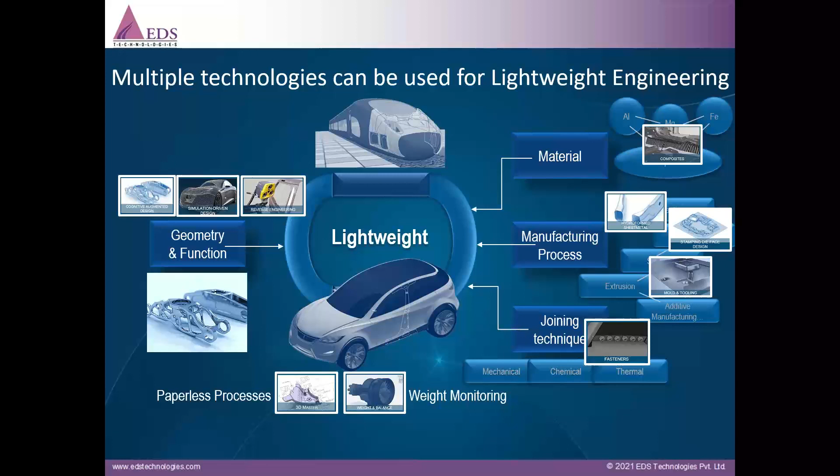Overall, the lightweight engineering process will save weight, save money, and lead to the best of designs using CATIA. This is the overall summary I wanted to highlight from the perspective of lightweight engineering, and how to benefit lightweight engineering using geometry and functions, materials, manufacturing processes, or joining techniques. There are many more aspects here which I could not cover, but all those aspects are meant for weight reduction, cost reduction, and improving the performance of a given component, assembly, or device.